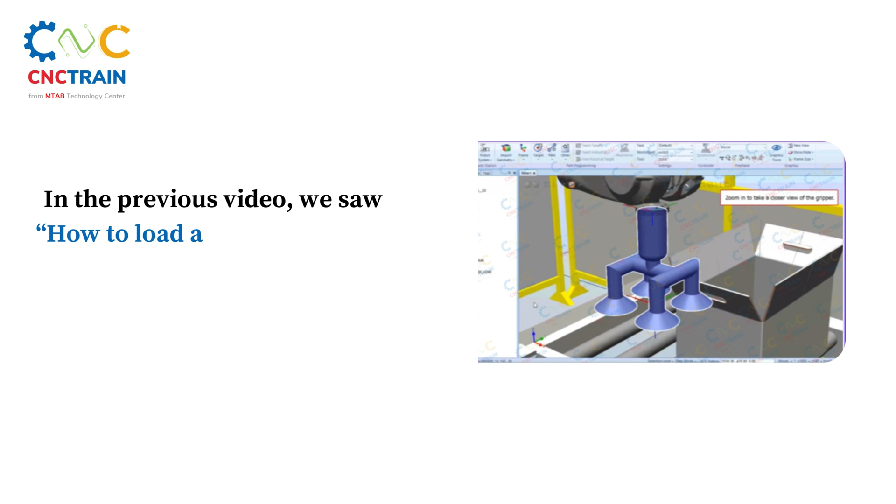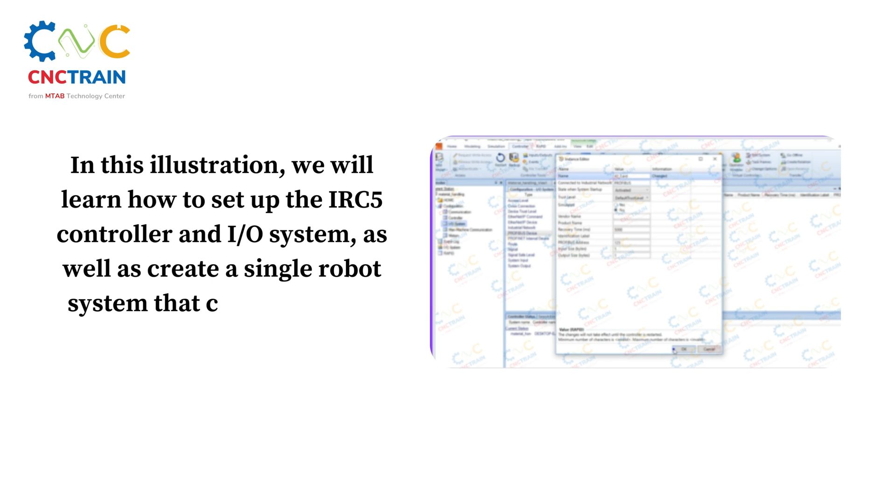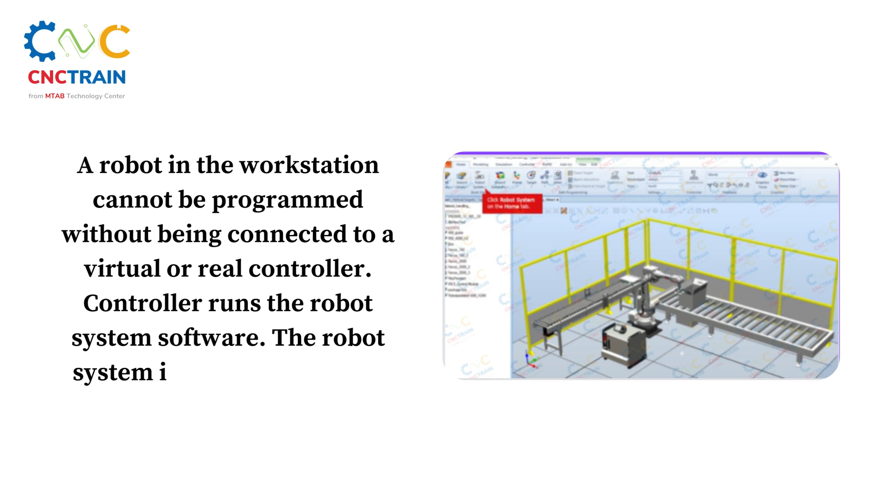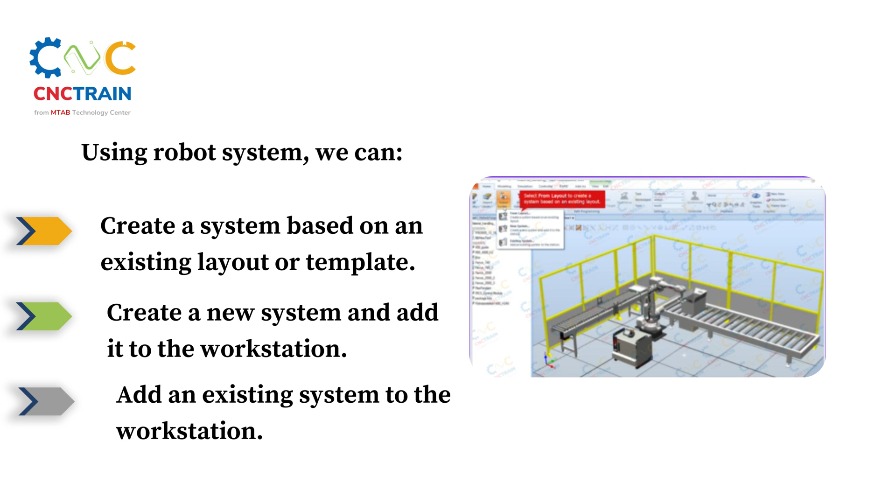We will be discovering the procedure for configuring the IRC5 controller and IO system in today's tutorial. We will learn how to set up the IRC5 controller and IO system, as well as create a single robot system that can operate on a virtual or real controller. A robot in the workstation cannot be programmed without being connected to a virtual or real controller. The controller runs the robot system software, also called the IRC5 controller. Using the robot system we can create a system based on an existing layout or template, create a new system and add it to the workstation, or add an existing system to the workstation. Now let's watch the video to see how to configure the IRC5 controller and IO system.

On configuring the IRC5 controller and input-output system: a robot in the workstation cannot be programmed without being connected to a virtual or real controller. The controller runs the robot system software, also called the IRC5 controller. In this demo, you will learn to create a single robot system to run on virtual or real controllers and configure the IRC5 controller and input-output system. Click or press Next to continue.

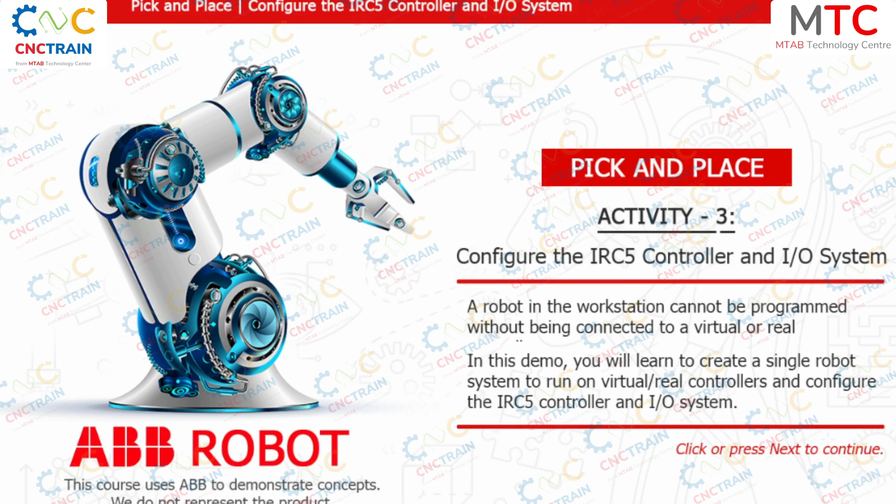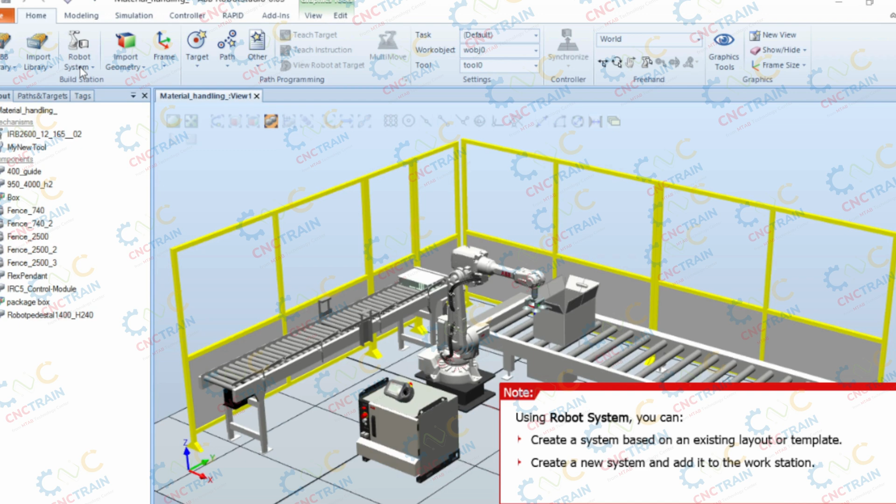On the Home tab, in the Build Station group, click Robot System. Using the robot system, you can create a system based on an existing layout or template, create a new system and add it to the workstation, and add an existing system to the workstation.

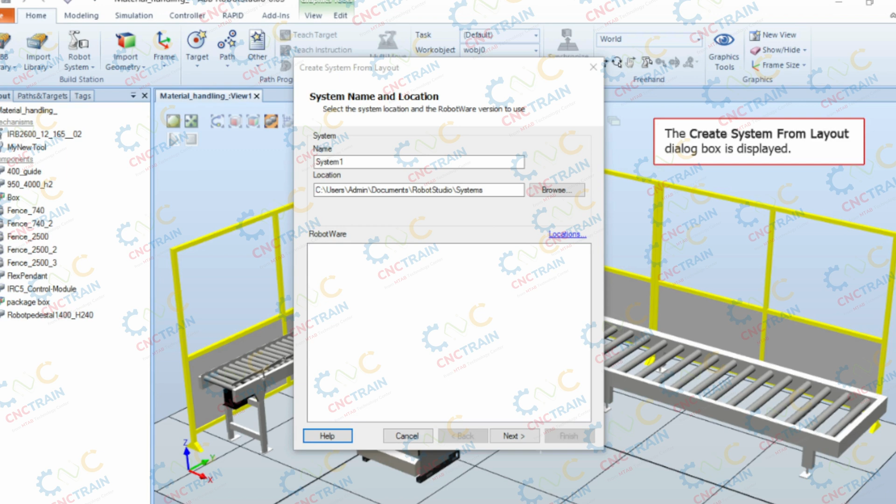Select From Layout to create a system based on an existing layout. The IRC5 single robot controller is already added in the robot system. The Create System from Layout dialog box is displayed. Double-click in the name field and enter the name of the robot system.

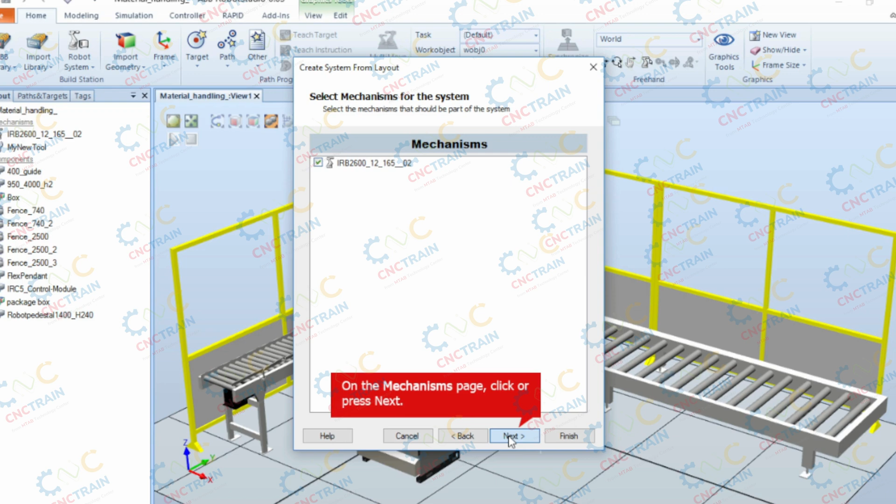In this case, enter material_handling. Click or press Next, then click or press Next again. The imported robot model is selected by default, and the robot system is configured to robot IRB

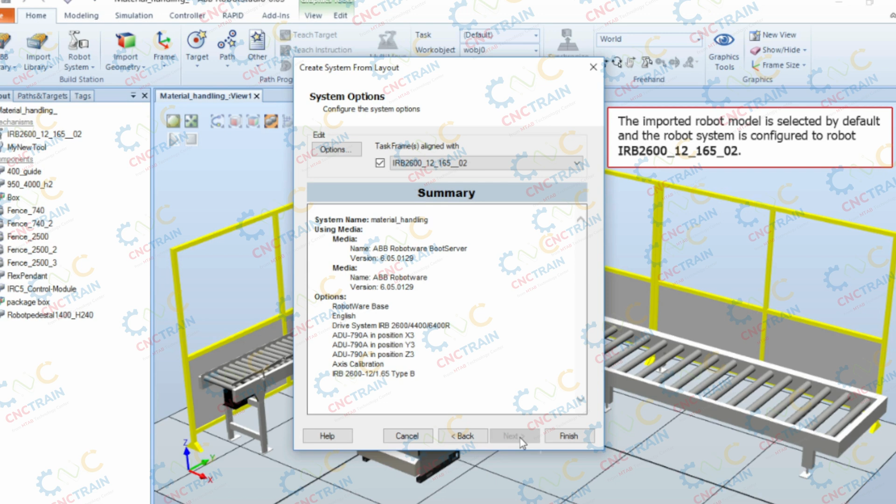2600_12_165_02. In the Edit section, click Options. The Change Options window displays the various features that can be added to the robot system.

In the Categories section, from the System Options list, select Industrial Networks. In the Options section, select the 969-1 Profibus controller checkbox. Select the 888-3 Profinet device checkbox. Click OK to close the Change Options dialog box.

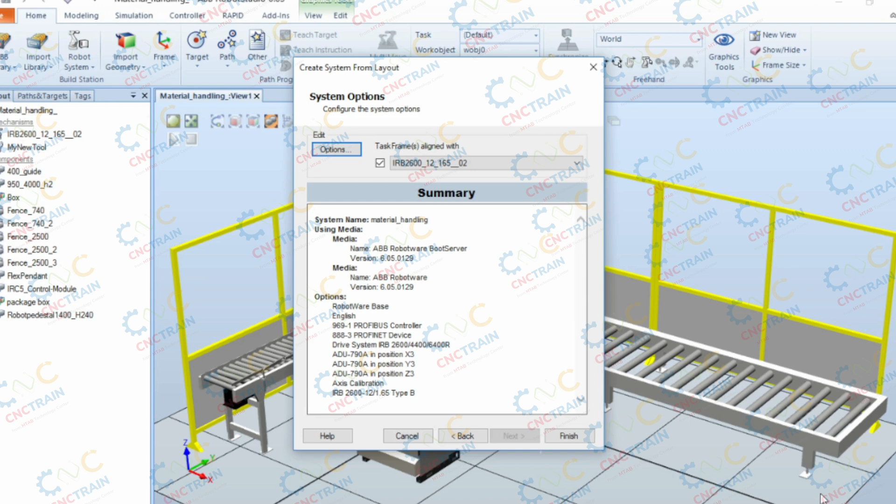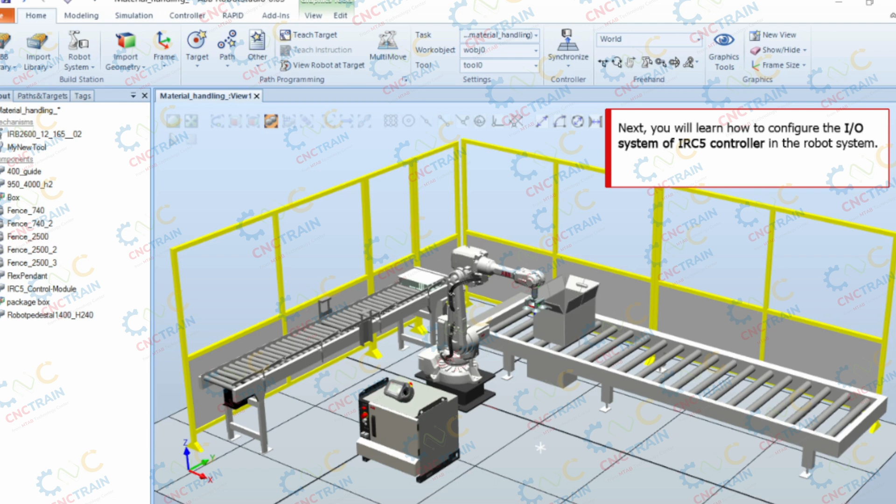In the Create System from Layout dialog box, click Finish. Now, the different robot system communications linked with the field devices are added to the controller. Next, you will learn how to configure the input-output system of the IRC5 controller in the robot system. Click or press Next to continue.

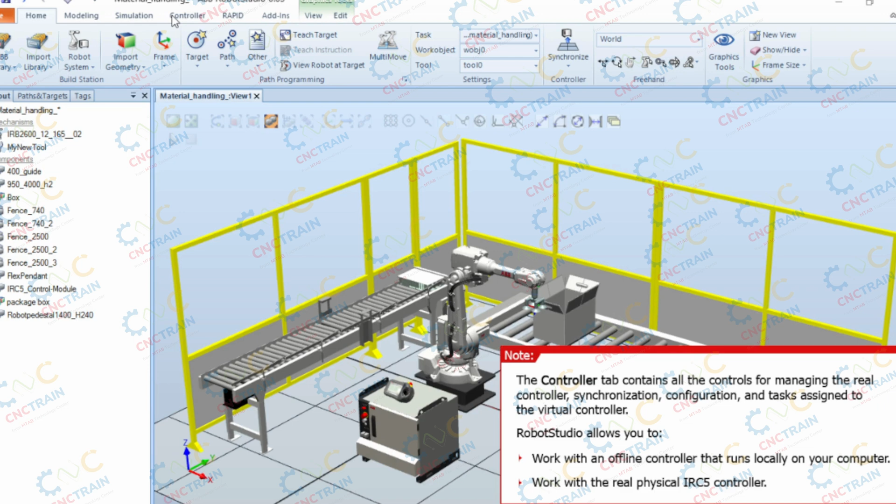Select the Controller tab. The Controller tab contains all the controls for managing the real controller, synchronization, configuration, and tasks assigned to the virtual controller. RobotStudio allows you to work with an offline controller, a virtual IRC5 controller that runs locally on your computer. This offline controller is also called Virtual Controller, VC. It also allows you to work with the real physical IRC5 controller, referred to as the real controller.

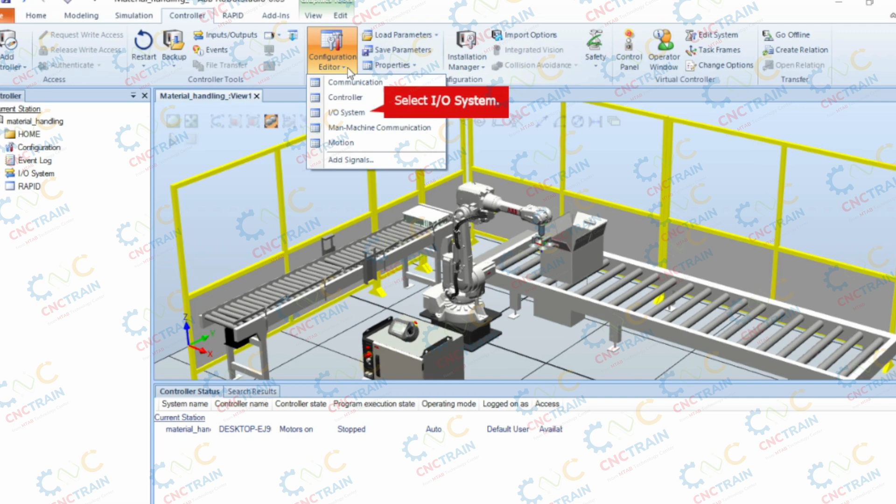In the Configuration group, click Configuration Editor. Configuration Editor allows you to view and edit the system parameters of the controller, such as communication, input-output system, controllers, motion, and so on. Select Input-Output System. The Configuration Input-Output System pane is displayed.

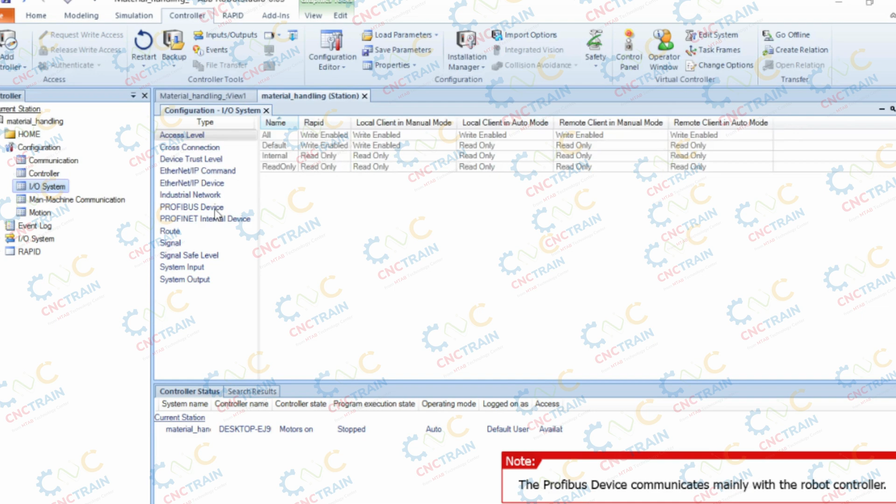In the Type section, right-click Profibus device. The Profibus device communicates mainly with the robot controller. Select New Profibus device. The Instance Editor window is displayed.

The system parameters can be modified in this editor. In the Name field, enter the name as IO_card. Click OK to close the Instance Editor window.

In the ABB RobotStudio dialog box, click OK to restart the controller. A restart of the controller is most often necessary for the new parameters to take effect. On the Controller tab, in the Controller Tools group, click Restart, then select Restart, Warm Start. The controller will be restarted and any changes made to the system will be activated after the restart.

Click OK. You have successfully created a single robot system and configured the input and output system of the IRC5 controller.